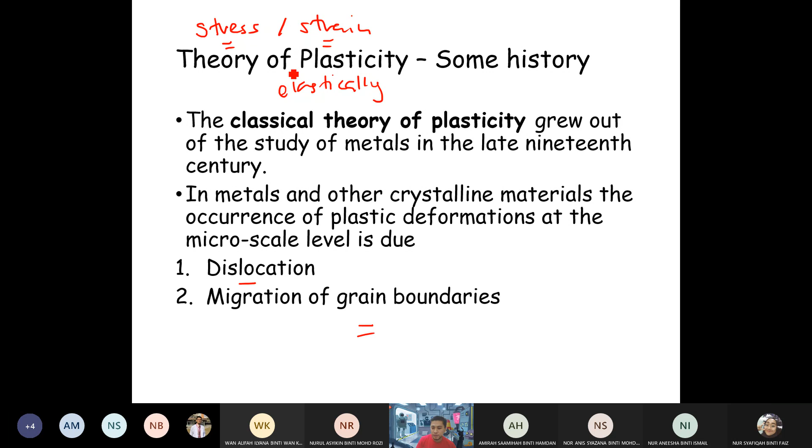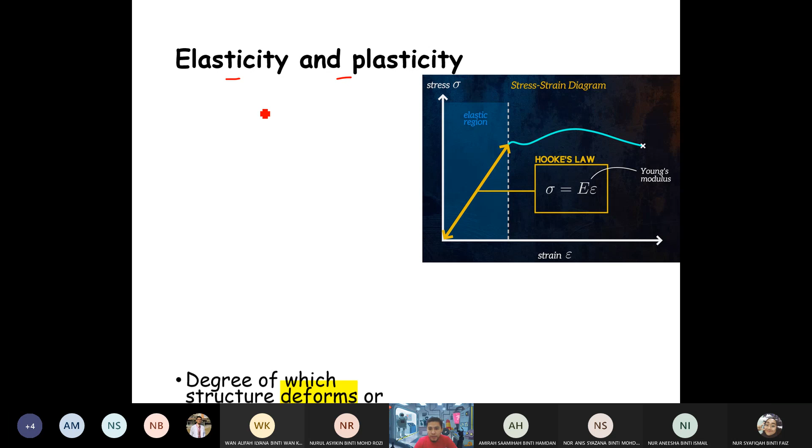Okay, so we will discuss elasticity and plasticity today. The degree to which a structure deforms or strains depends on the magnitude of imposed stress, right? So stress and strain are proportional to each other, and we have this equation that we call Hooke's law. This is sigma equals E times epsilon.

Okay, what is sigma? What is this? Okay, the symbol sigma is stress, and epsilon is, what is this? Siapa tahu what this symbol represents? Epsilon. Strain. Yes, correct. Okay, this is Hooke's law.

Stress equals E, where E is Young's modulus, times epsilon. Epsilon is strain. Okay.

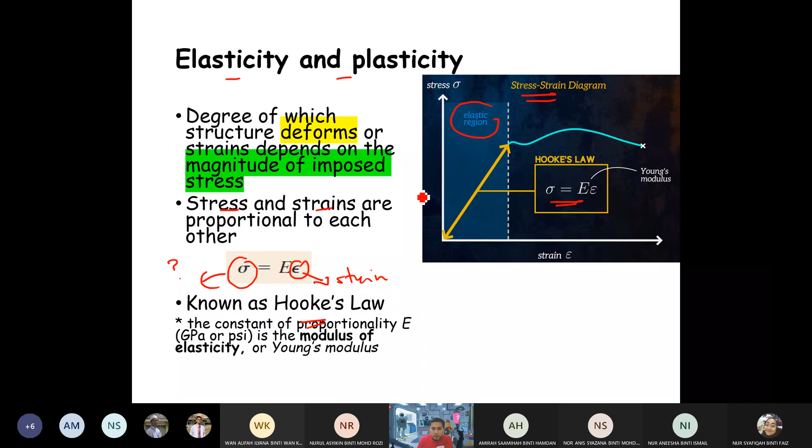Okay, if you look at the figure here, this is what we call a stress and strain diagram. We can see here that the linear relation in the elastic region is defined by Hooke's law: stress equals Young's modulus times epsilon, or strain. So the ratio between stress and strain is what we call Young's modulus. And Hooke's law usually only applies for small strain.

Okay, Hooke's law only applies for small strain. But what happened? Can you guess what happens if we have a larger strain? When we have a larger strain, the relationship between stress and strain is no longer linear.

So if you take a look at the figure here, at this stress and strain diagram, at a small strain, we have a linear relationship between stress and strain. Within this region, we have Hooke's law that we can apply. But when we enter this region here, we have a larger strain, and the relationship between stress and strain is no longer linear. So Hooke's law in this region is no longer applicable. So the deformation is not reversed when we reach this stage, even when we remove the loading.

Faham? Okay. When we have reached this region, even when we remove the loading, for example, the spring will not go back to its original position.

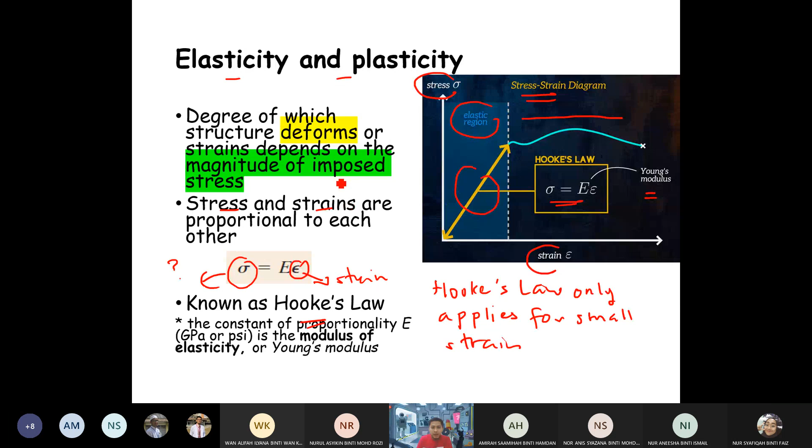Okay, a deformation in which stress and strain are proportional is what we call elastic deformation, like what we can see here. Elastic deformation is non-permanent, meaning that, like I mentioned before, when we release the loading, the piece will return to its original shape.

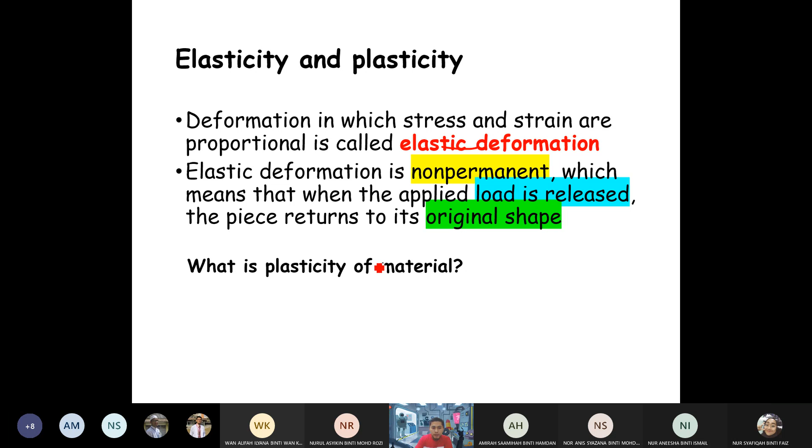Okay, note that when I mention plastic, do I refer to plastic like what we have in polymeric material? When I mention plastic here, can you associate this with a plastic bag? Can you?

When I mention about plastic here, it does not refer to a plastic like what we have in polymeric material, or for example, plastic bag. But when I mention this term plastic, it means permanent strain in any material.

So here we have the definition of plasticity. Plasticity can be defined as the ability of a material to undergo some degree of permanent deformation without rupture. Plastic deformation occurs after the elastic limit has been exceeded.

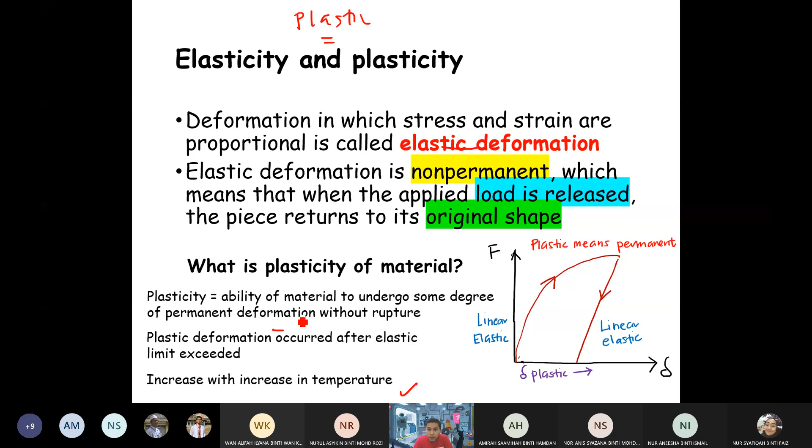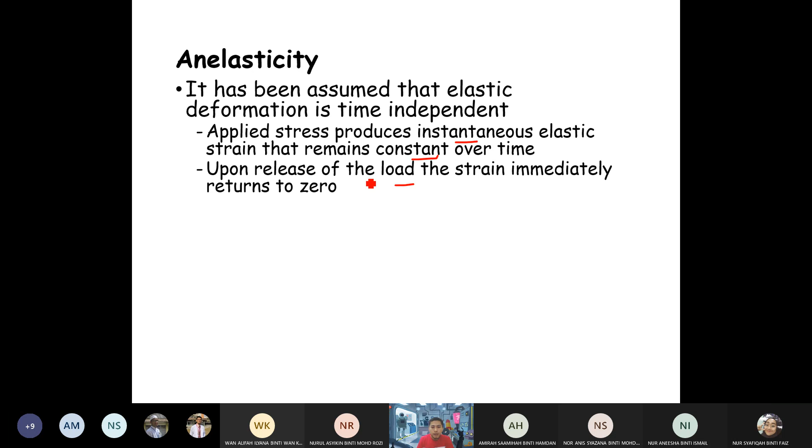It has been assumed that elastic deformation is time independent. Applied stress will produce instantaneous elastic strain that remains constant over time. When we release the loading, the strain will immediately return to zero.

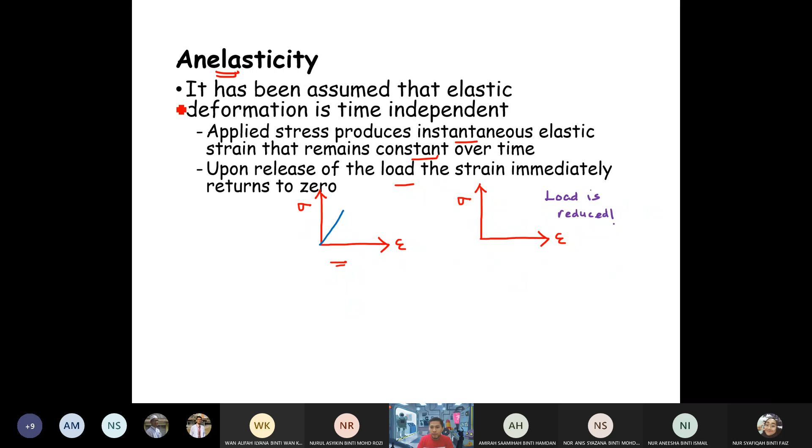For example, here we have this graph. When we apply loading, the strain will increase, and the relationship between stress and strain is proportional. But when we remove the loading, immediately the strain will return to zero. However, for anelastic material, the elastic deformation will continue even after the stress application.

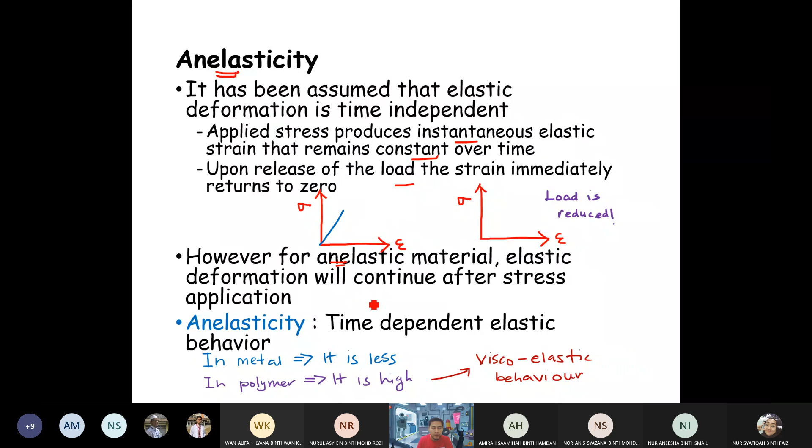We can define anelasticity as a time-dependent elastic behavior. In metal, this phenomenon is quite less compared to polymer, but in polymer we don't really call it anelasticity behavior. In polymer, we use this term, viscoelastic behavior.

Have you ever heard about the term viscoelastic? Anyone heard this term viscoelastic before? Anyone?

Viscoelasticity is a material that exhibits both viscous and elastic characteristics when it experiences deformation. We see the word here is a combination of viscosity and elasticity. So this is a material that exhibits both viscous and elastic deformation.

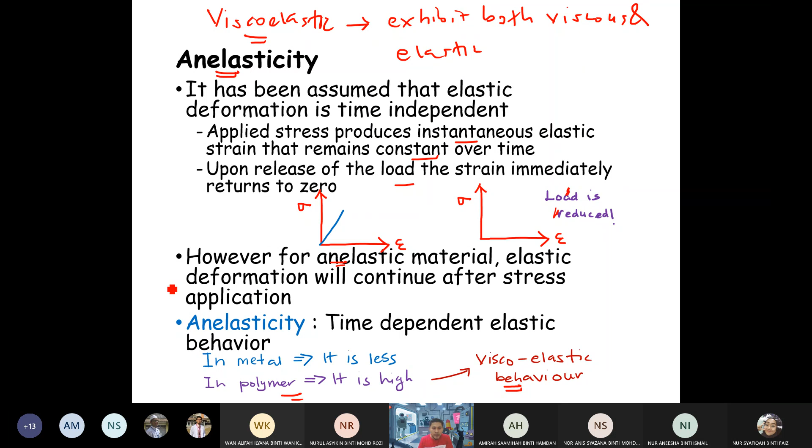I have mentioned just now the term viscoelastic. Usually we associate this with a polymeric material. For metal, usually we call it anelasticity.

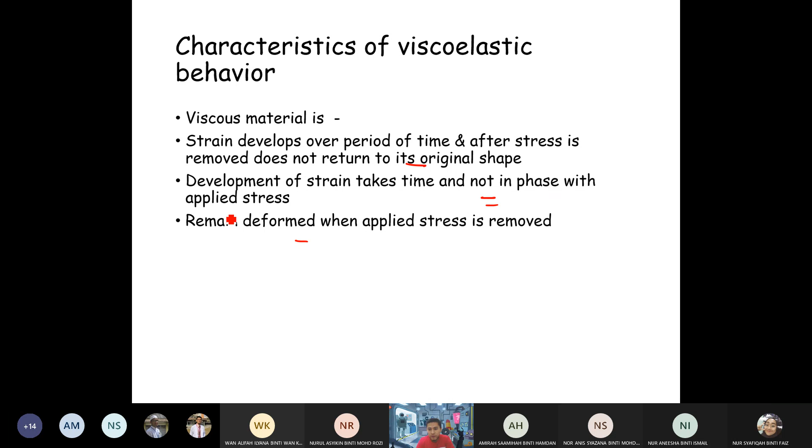Here are some examples of viscoelastic behavior. Before that, a viscous material is one where the strain develops over a period of time, and after the stress is removed, it does not return to its original shape. The development of strain takes time and is not proportional, or not in phase, with the applied stress, and the material remains deformed even after we remove the applied stress or loading.

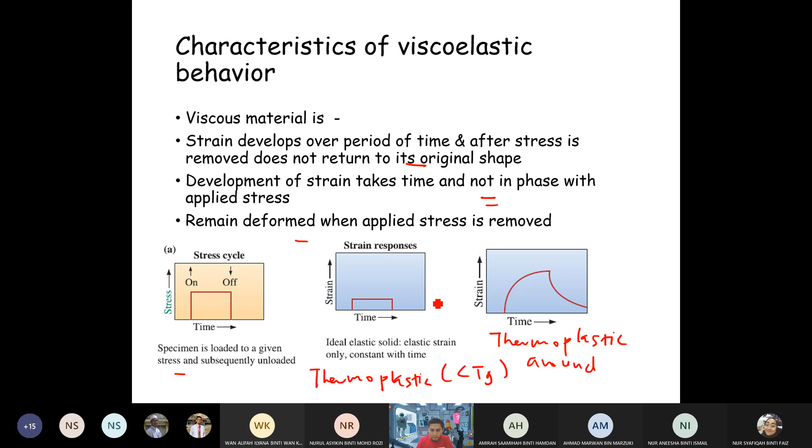So what is viscosity? What are viscosity and viscous material? Can you give me the definition of viscosity?

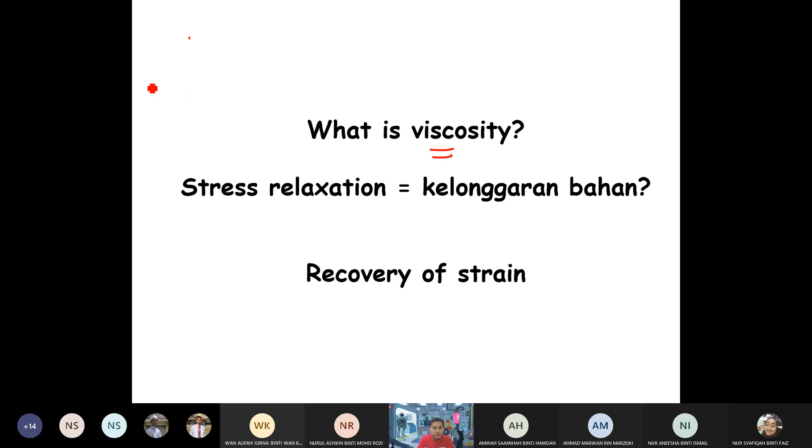For example, if we have water and honey, which one is more viscous? Honey is more viscous, right? Because it resists flow compared to water, which can flow freely compared to honey. Honey is harder to flow, so we can say that honey is more viscous than water.

So in a viscoelastic material that is held under constant strain, if we wait, we can see that the level of stress decreases over a period of time. This phenomenon is what we call stress relaxation.

The recovery of strain, on the other hand, refers to the change in shape of the material after the stress that caused deformation is removed. Stress relaxation means that the stress decreases over a period of time. This is the definition of stress relaxation.

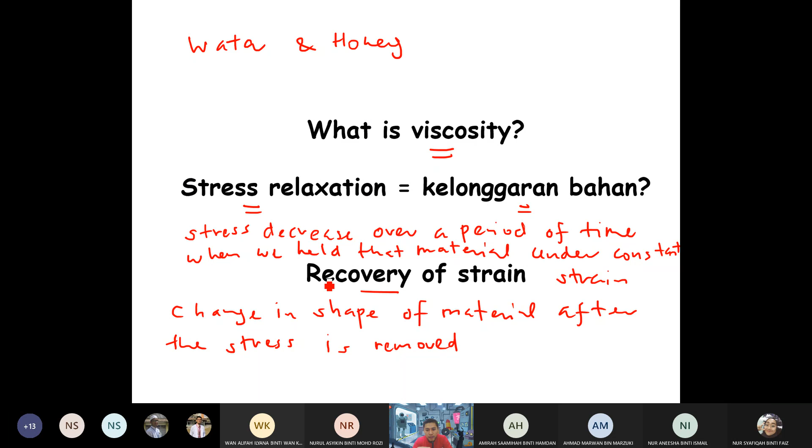Some examples of a viscoelastic material: synthetic polymers, wood, human tissue, as well as metal at a high temperature. All these materials display significant viscoelastic effect.

Now we talk a bit about Newtonian and non-Newtonian material. Newtonian fluid, non-Newtonian fluid, rheopectic, thixotropic, dilatant - what are the differences between all these liquid properties? All these are liquid properties. What are the differences between all these terms, and most importantly, why do all these properties matter?

All fluid can be broken into two basic types: Newtonian fluid and non-Newtonian fluid. Newtonian fluid is a fluid whose viscosity remains constant no matter the amount of shear applied, for a constant temperature. So this fluid has a linear relationship between viscosity and shear stress. And then we have non-Newtonian fluid.

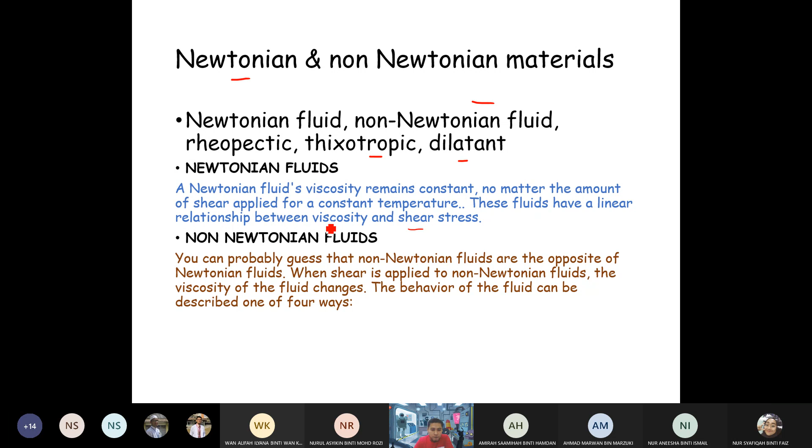As you can guess, non-Newtonian fluid is the opposite of Newtonian fluid. When shear is applied to a non-Newtonian fluid, the viscosity of the fluid changes, and the behavior of the fluid can be described in one of four ways.

We have dilatant - this is for non-Newtonian fluid. We have dilatant, pseudoplastic, rheopectic, and thixotropic. When shear is applied to non-Newtonian fluid, the viscosity of the fluid changes.

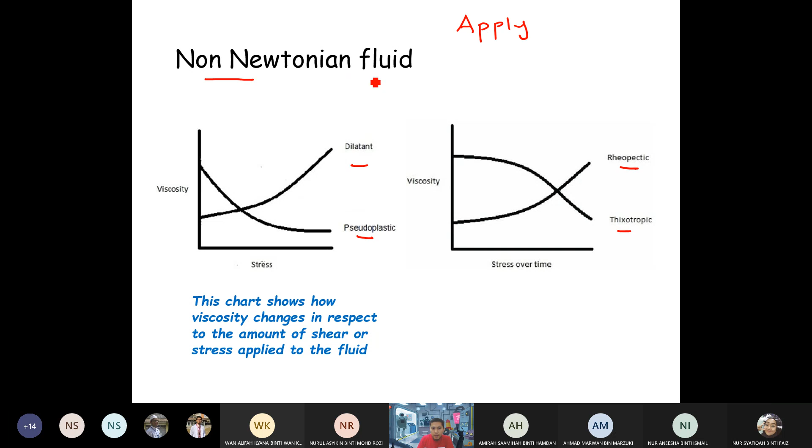When we apply shear, viscosity for non-Newtonian fluid will change, and these changes can be described in four ways: dilatant, pseudoplastic, rheopectic, and thixotropic.

For dilatant, the viscosity of the fluid will increase. As we can see here, the viscosity of the fluid increases when stress or shear is applied.

Then we have pseudoplastic, which is the opposite of dilatant. The more shear or stress we apply, the less viscous it becomes. This chart shows how viscosity changes in respect to the amount of shear or stress applied to the fluid.

Then we have rheopectic and thixotropic. For rheopectic liquid, it is quite similar to dilatant, except here we involve time. When we apply shear or stress, viscosity increases, but the difference is we include time - over time, the viscosity will increase.

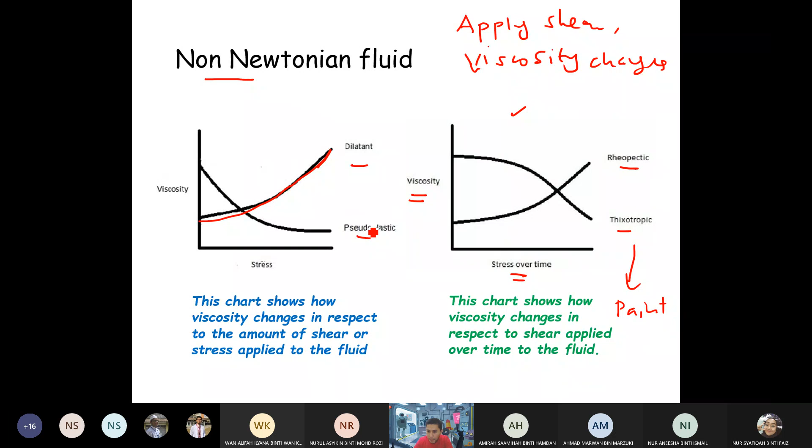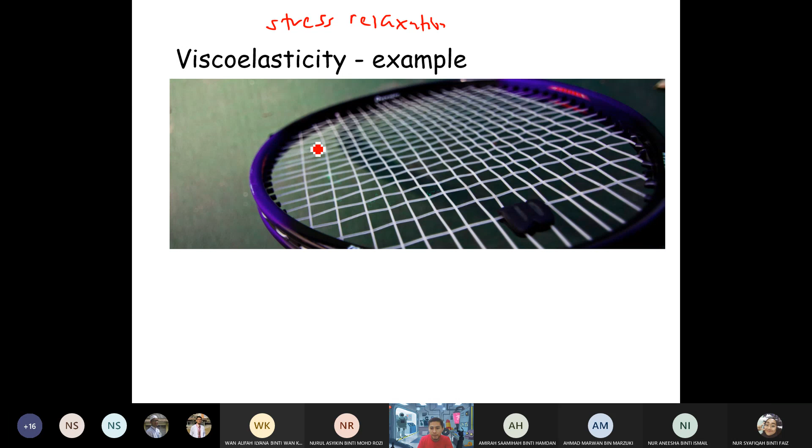This is an example of a viscoelastic material - a tennis racket, the common example of stress relaxation. If you have a racket, over time it becomes looser, even though we don't play with it. This is the example of a stress relaxation.

We can see that the level of stress in the nylon string of a tennis or badminton racket, even if we don't use the racket, will decrease with time. Over time the string becomes looser and we need to tighten it again. So that is the example of stress relaxation - over time the stress decreases. Unlike a viscous material, when applied stress is removed, part of the strain will recover over a period of time. This is a good example of stress relaxation in a nylon string in a racket.

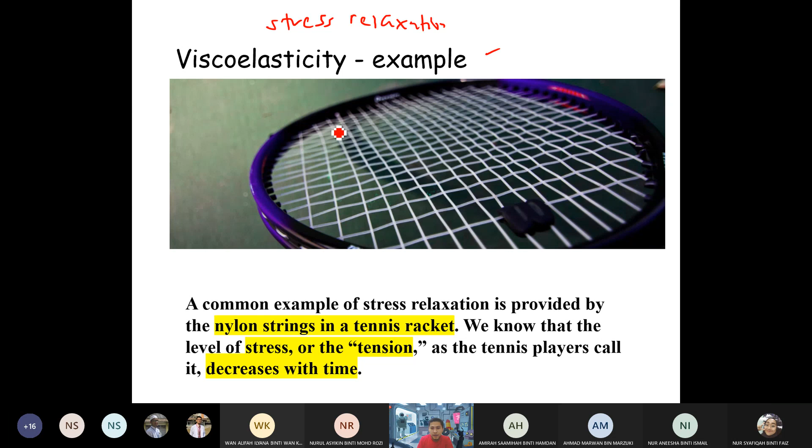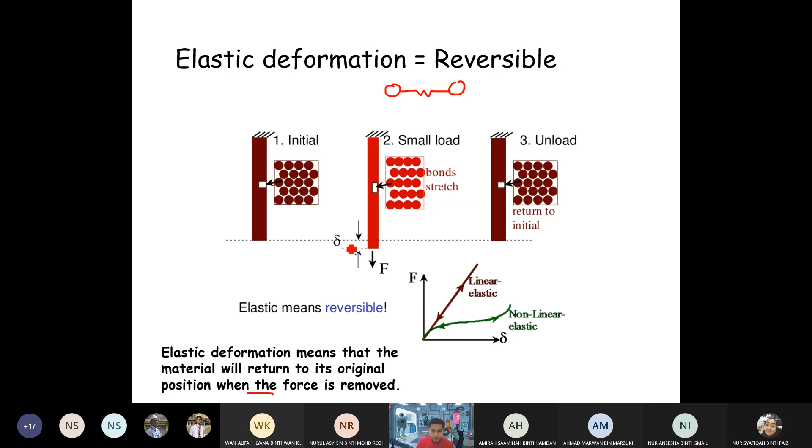For plastic deformation, we can see here that plastic deformation means a permanent deformation.

Okay, so this is the initial stage when we apply loading, the bond with the original atom neighbors start to break. The bond will break and we will reform a new group of atoms.

So when this occurs, the stress is relieved. The material will no longer return to its original form. The deformation is permanent and non-recoverable. So we can say that the material now moves into the region that we call plastic deformation.

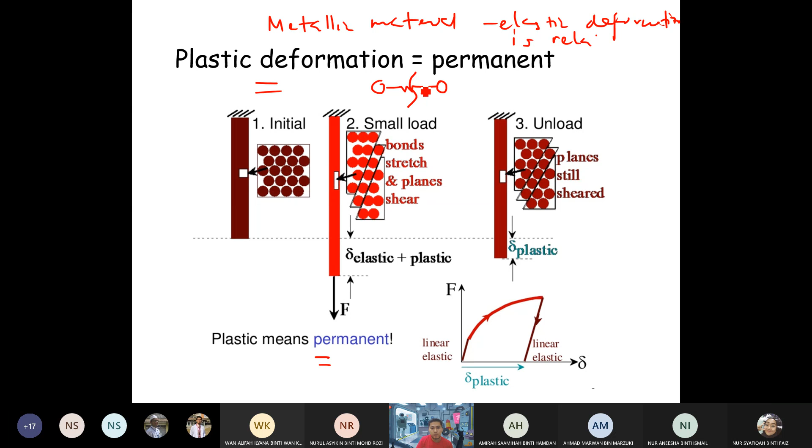For most metallic material, the elastic deformation is quite small. At some point, the strain is no longer proportional to the applied stress. For metallic material, elastic deformation is relatively small compared to polymeric material.

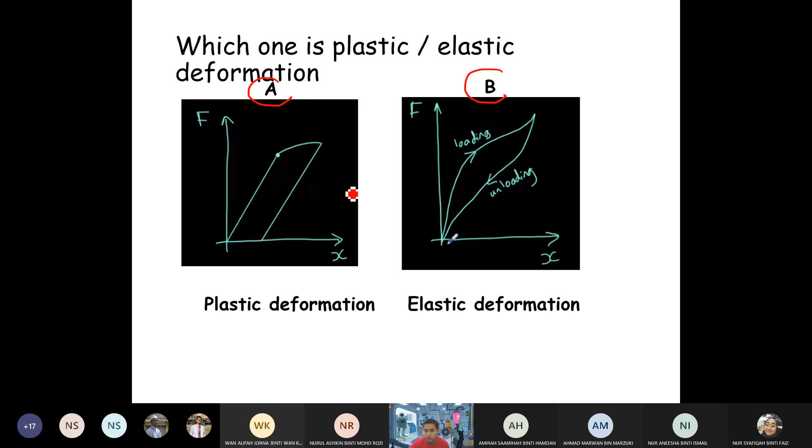An example of this type of material is rubber. We can see for this type of material, even though it is still elastic deformation, it does not follow Hooke's law, because we cannot see a straight line proportional relationship between the force and the extension.

But still we call this elastic deformation. We can see that it does not follow the same path backward. When we apply loading, this is the path, but when we remove the loading, it does not follow the same path backward. What does it mean? It means that when we apply loading, more work is needed to stretch the rubber compared to the work needed to put it back into its original position.

The energy is the area under the graph, so loading requires more work compared to unloading. So where does all the excess energy go? The excess energy is released as heat. The work required for loading is more than unloading. The excess energy, the difference between loading and unloading, is released as heat.

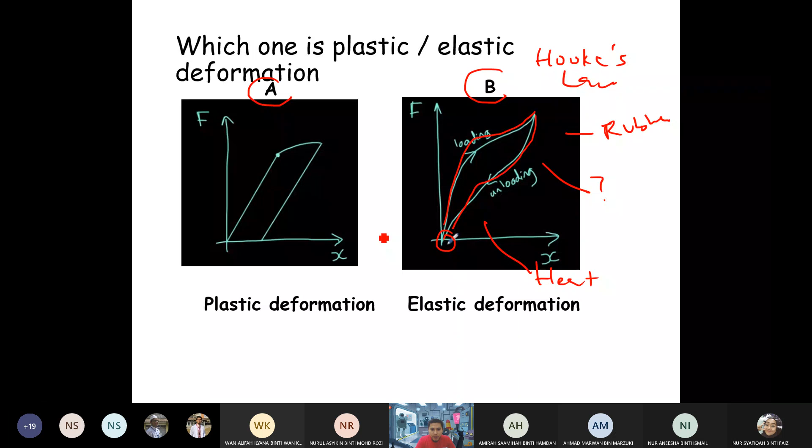If you pull a rubber band for a while, it gets hot, right? That is where the excess energy goes. It is released as heat.

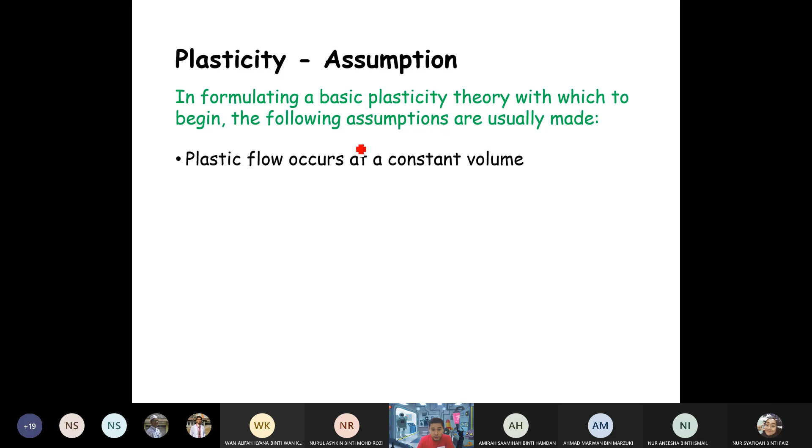Okay, here are some assumptions of plasticity. When we formulate a basic plasticity theory, here are some assumptions. The plastic flow, we assume it occurs at a constant volume. And a modest hydrostatic pressure does not cause yielding.

P is less than E divided by 100. When we say modest, we mean that the pressure is less than the modulus over 100. We also neglect strain hardening, assuming perfect plasticity. We also assume the material is isotropic, having identical values of property in all directions.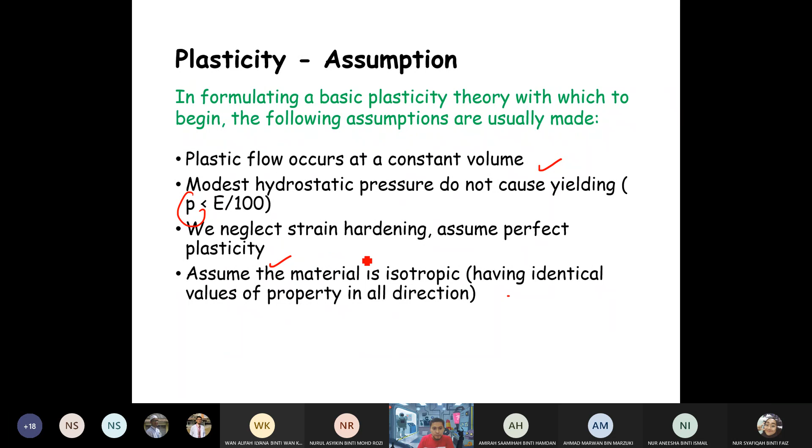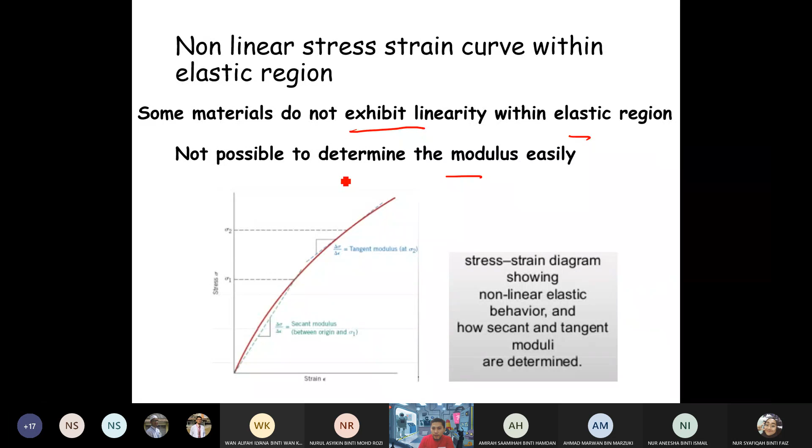Some materials do not exhibit a linear stress-strain curve within the elastic region, like what I showed in the previous slide. So it is not possible to determine the modulus easily. Examples of this material are gray cast iron, concrete, and many types of polymer.

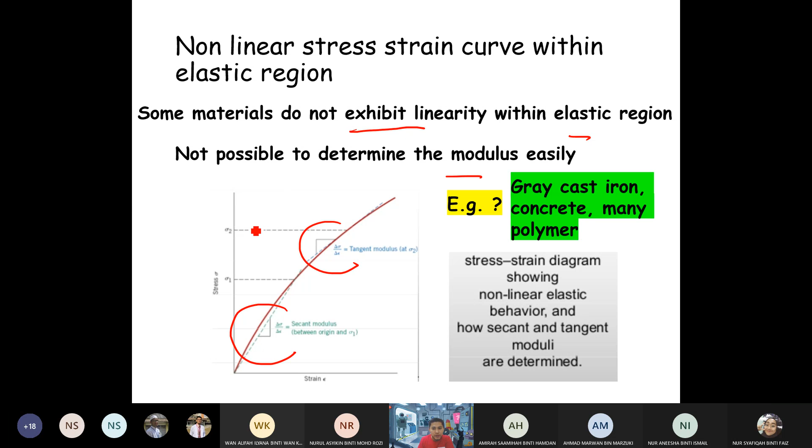So for nonlinear material, we use the slope of the tangent as a secant modulus, a tangent modulus. We use the slope of a tangent as a varying quantity to replace the Young's modulus.

Okay, to solve this question, we use the Hooke's law equation. Stress equals strain times the Young's modulus E. Strain is the change in length over original length, times E. We want to find the change in length because we want to calculate the resultant elongation. So we rearrange the equation to solve for this.